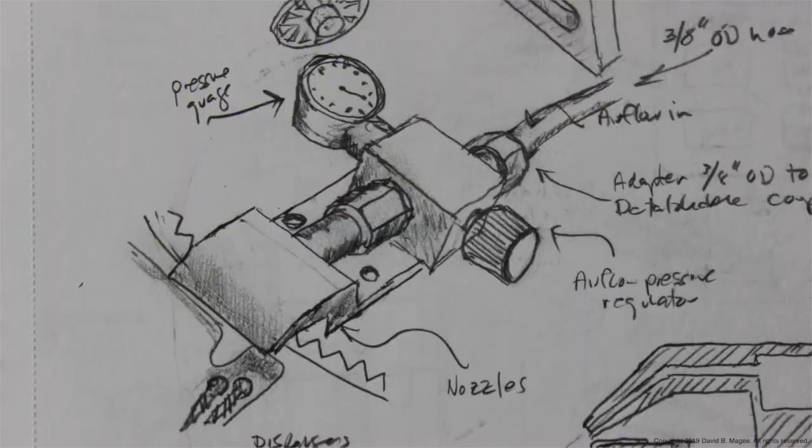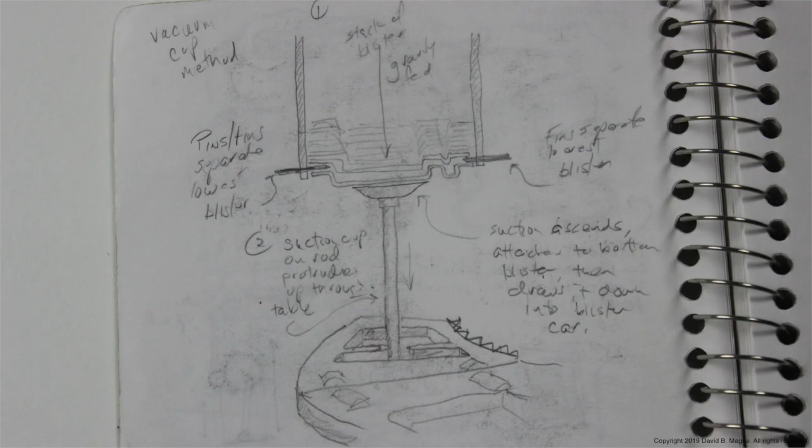In the next step, I took each one of these tasks and sketched out various machines that could accomplish that task. I'd usually sketch several designs for the same task, and from that I would pick what I thought was the best. Once I thought I had the optimal design, I built a digital 3D model of what I'd drawn in CAD. I then printed and assembled the parts.

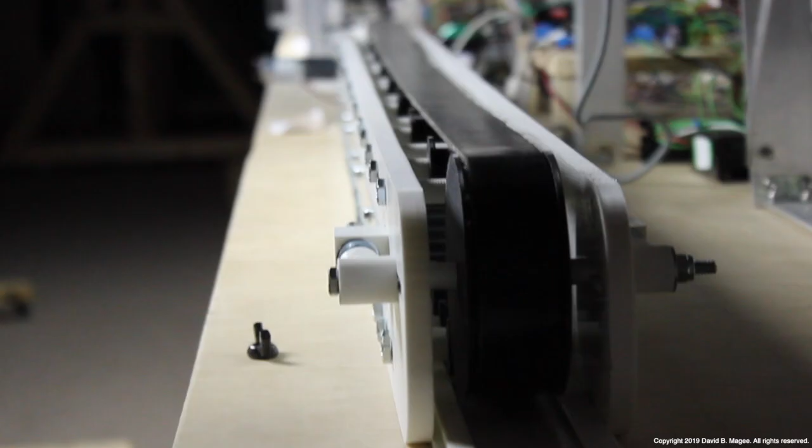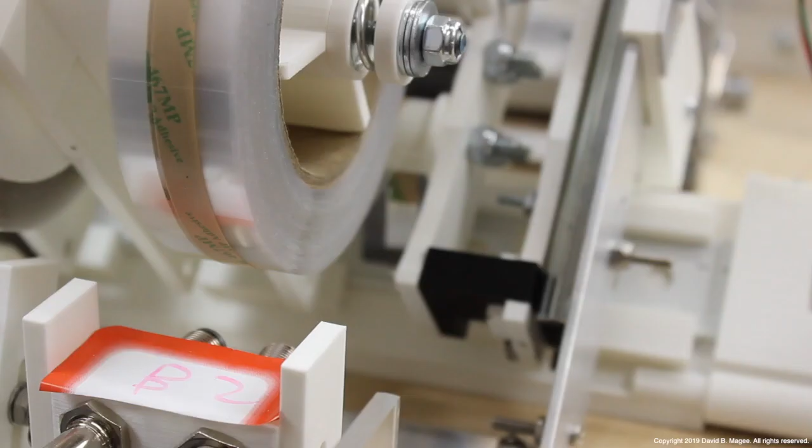Our assembly process is built along a straight track. It starts with a magazine of blank bases. A plunger slides beneath the magazine and loads one blank base onto a beveled track. As these bases are pushed along, they pause beneath a taping applicator mounted on a sliding gantry. Two lasers recognize breaks between the tape segments and inform the rollers when to advance and when to stop.

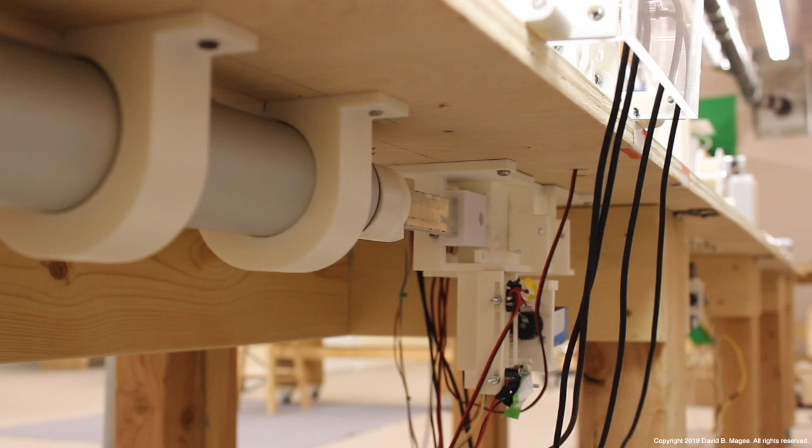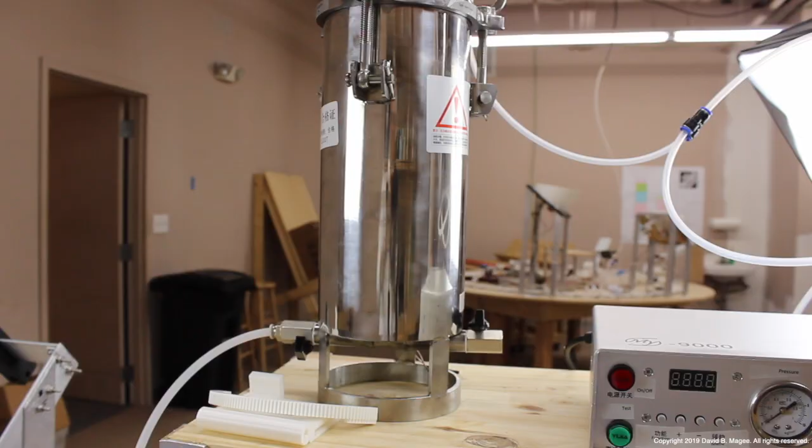Once taped, bases are pushed along into a flipper that rolls the base onto its back. A spear ascends up through the latch hole in the base, while a linear actuator then pushes the base forward onto a second track. As these bases advance down the track, they pause beneath the adhesive applicator. Here, adhesive is fed from a pressure pot through a diaphragm valve and eventually through 5 dispensing needles to the face of the base.

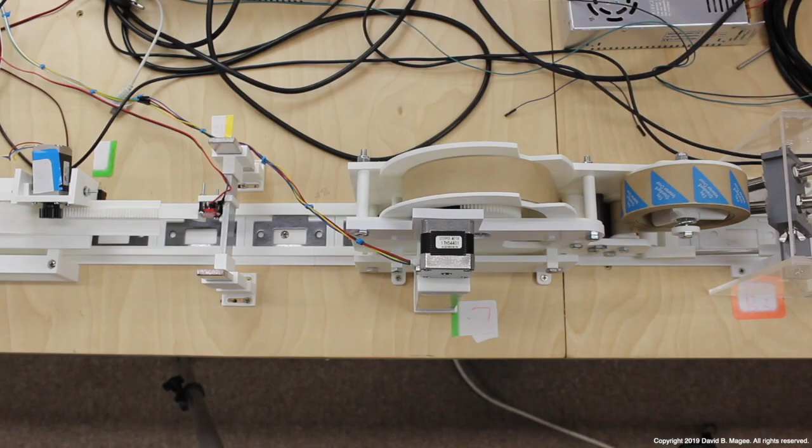The next machine extracts a strike plate from a magazine and pushes it out over the pre-glued base. A spear ascends up through the latch hole in the base to guide the strike plate into place. The spear then descends out of the way and the bases advance along the track. At the next stop, a label applicator dispenses a triangular label onto the face of the base. A laser communicates the position of the label roll to the motherboard.

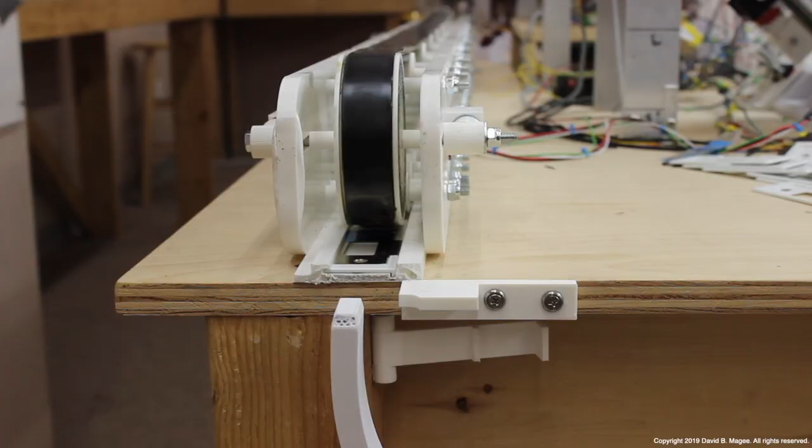The fully assembled and labeled unit is then fed beneath an upside-down conveyor. This does two things. First, it applies pressure while the adhesive sets, and secondly, it takes over and pulls the base forward along the track. As the unit exits the conveyor, the adhesive is set, and the units are pushed out and onto a long spear. Once full, these spears are switched out and taken to the packaging line.

The packaging process is built around a circular course with 24 cars. Each car is loaded with a clear plastic blister.

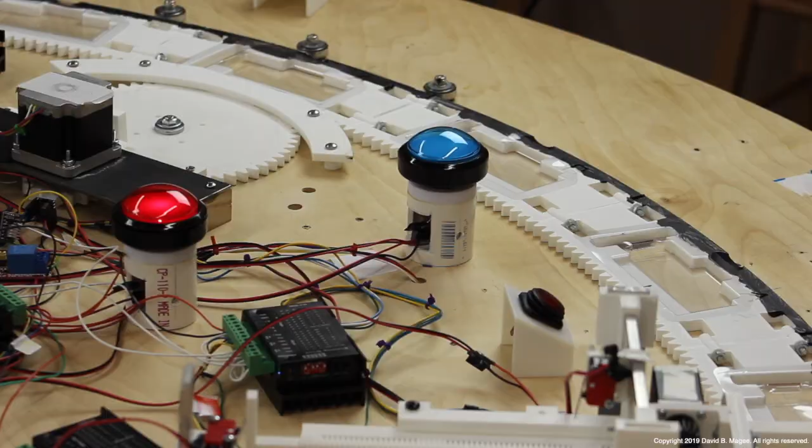These blisters are preformed to hold 2 units and 4 installation screws. Once loaded, the operator hits the start button and the cars begin to rotate. Each car will make 24 precision stops per rotation. These stops are controlled by a laser that shoots down onto the cars as they pass.

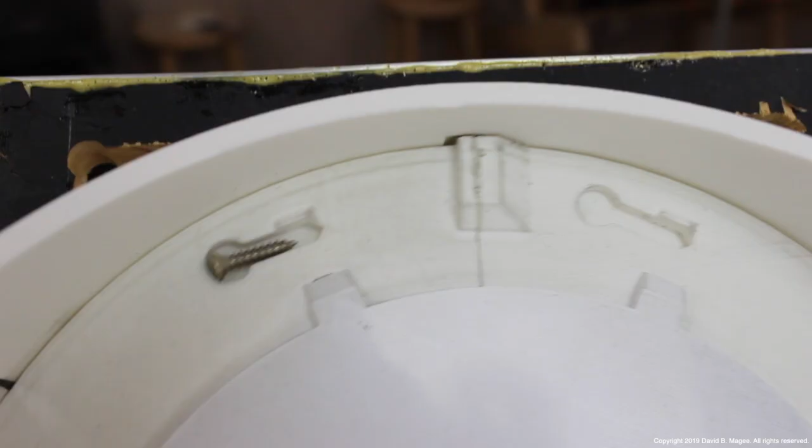The first stop on the course is an elevated hopper filled with short screws. When a car stops beneath it, a disc in the hopper begins to rotate. As it does, cutouts in the disc catch single screws and separate them from the others. When screws reach the top of the hopper, they drop through the bottom into a chute.

A proximity switch on the bottom of the chute detects the metal as it passes and communicates this to the motherboard. Screws funnel into a hose, then shoot down around and into the dispenser where they drop into the screw compartment in the blister. At the next station, a second hopper dispenses 2 longer screws.

But to make sure there's room in the blister compartment for these screws, the blister passes a blower that pushes the small screws to the far end of the compartment with a puff of air. Since the second hopper dispenses large screws, the cutouts in the disc are longer. But otherwise, the hoppers work the same way. Screws are picked up, dropped, and dispensed into the blister at the bottom.

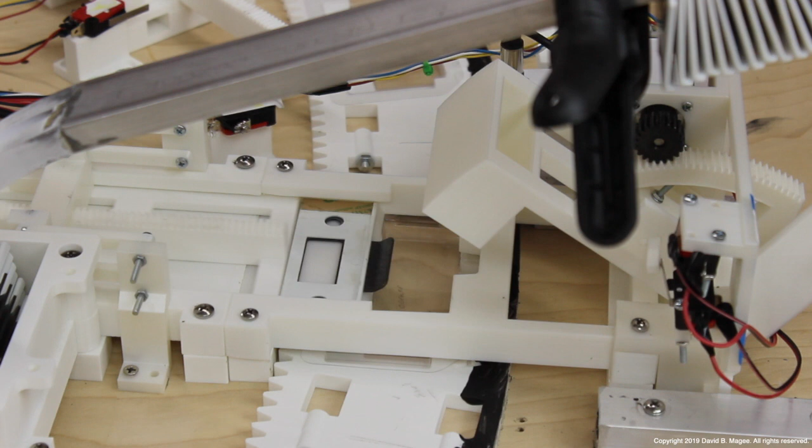With all 4 screws loaded, cars advance to the next station where finished units from the assembly table are loaded. When the car is in position, a plunger slides the bottom unit from the magazine and onto the loading deck. Once on deck, a second plunger pushes the finished unit into the blister. Just to make sure the unit fits all the way down into the blister, a drawbridge-like arm presses the unit into place.

At the next stop, we load the second unit. It works the same way. A plunger pushes the bottom unit onto the loading deck, while the second plunger pushes it into the blister. And, again, a drawbridge-like arm presses the unit down and into position.

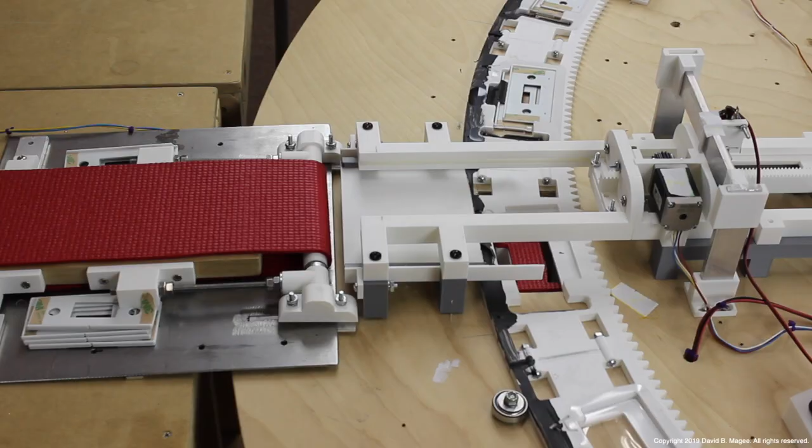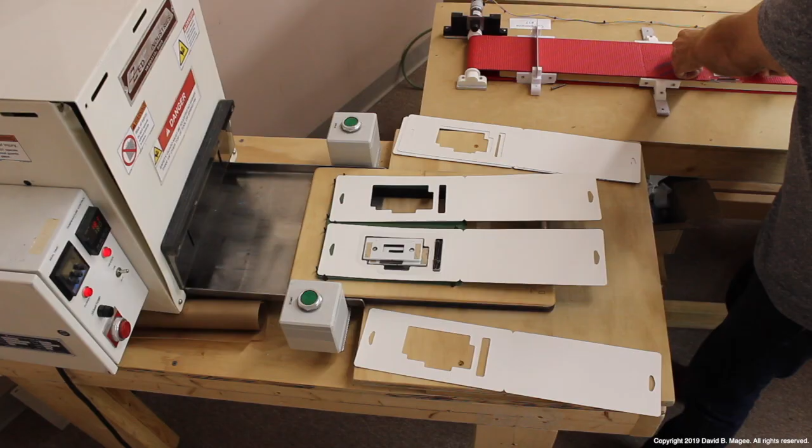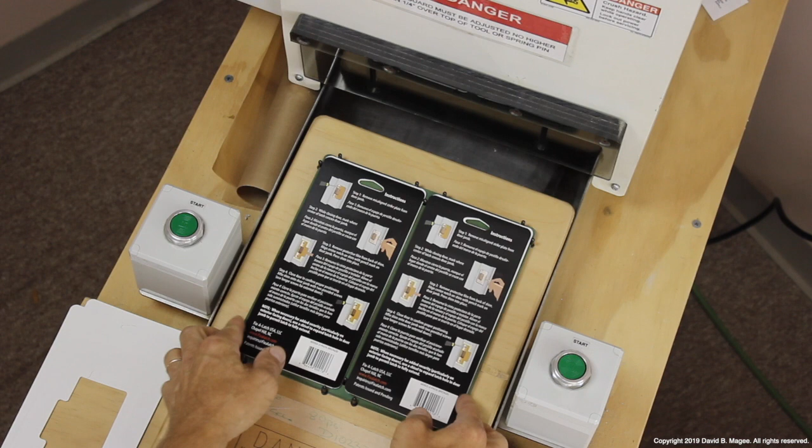With the blister fully loaded, it then advances to an elevator that extracts the loaded blister from the car, then slides it across and onto a conveyor belt. Here, the operator checks the contents, then loads the blister into a fold-over card before sliding it into a sealing machine. Heat and pressure from the sealer activates adhesive on the card. This seals the blister in between the 2 fold-over card pieces.

For us, the benefits of automation have been significant. First, we can produce more product in less time. Before it took us on average 35 seconds to assemble 1 unit. Now we can do it in 7. That means we don't need as much inventory on hand, and we can effectively build on demand in response to big orders. Second, what once required a team of 8 people can now be done with 2, and with better quality.

Third, our automated production facility requires half the space that our manual process required, so that's less fixed overhead for us. Finally, if we need to expand production in the future, and I certainly hope we do, we'll simply print out another production line, assemble it, and double our production capacity.

Advice for other small manufacturers? Well, during the course of automating our business, it occurred to me that there must be thousands of other small manufacturers in the same position who'd like to automate but really don't know where to start. We accomplished what we needed with a very modest budget, and along the way we learned a whole lot. So I guess my suggestion would be to reach out to us because we probably can help you.